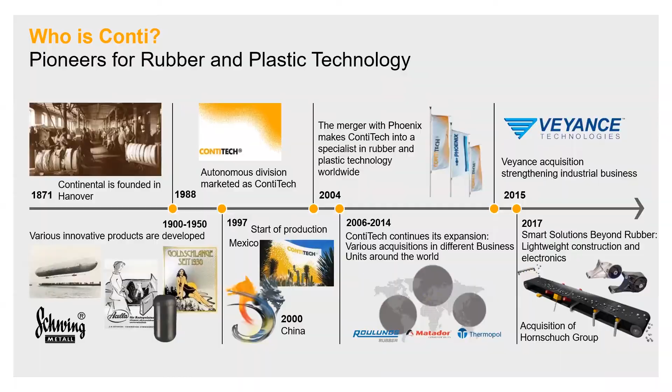And since then, they've been heavily involved in rubber technology, almost 150 years of experience, from tires and belts to the hose products that we're going to talk about today. What we bring is the technical competence from the raw material design all the way up through hose manufacturing and assembly, and then the global presence and customer care. So we have experience and expertise at every one of these steps that helps to guide us.

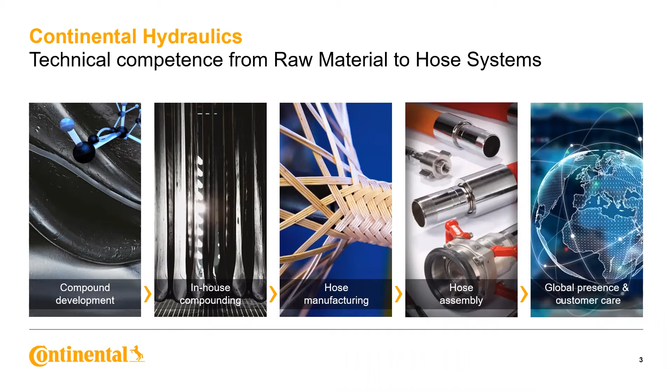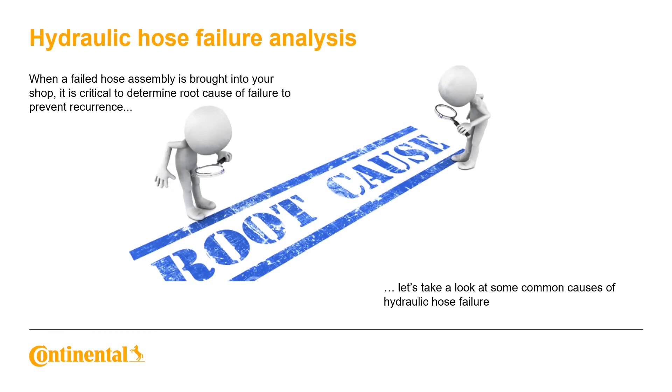And what we're going to be talking about today is, first, we're going to look at some common methods of hose failure and how to identify those if you should see one of them come into your shop looking for a replacement. And then we're going to go into the methodology that we call STAMPED. That's going to help guide you through the process of selecting a replacement hose to make sure that we're coming up with something that's going to perform in the application, and that we're getting the right product into the customer's hands. So without further ado, let's take a look at some of these common causes of hose failure.

The number one most common cause of a failure for hydraulic hose is abrasion of the outer cover. And you can see in the photo what that's going to look like. What this does is it exposes the reinforcement layer, which is typically a wire braid or wire spiral, and allows the ambient atmosphere to corrode that, leading to loss of tensile strength in the wire. And this will end with a hose failure via a burst or a rupture if it's not removed from service very soon.

So there's a couple different things you can look at to replace this type of hose with, but one of the solutions that Continental promotes is hoses with our X-Life cover. These are going to have 14 times the abrasion resistance of a standard hose, so you're able to last that much longer in the application.

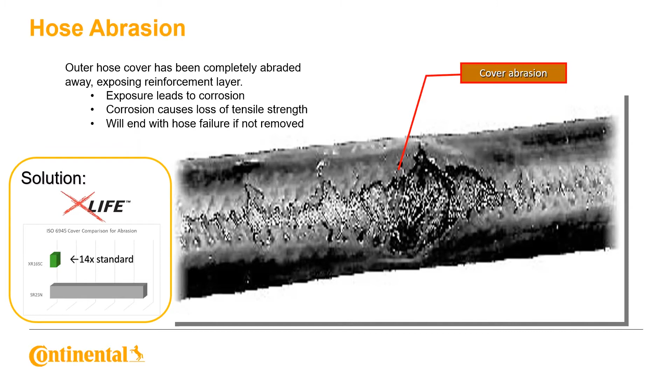Next failure we're going to see is a failure behind the fitting. This can be caused by a couple different methods, either by exceeding the rated bend radius when the hose is installed on the equipment by bending it in too tight or too sharp of a bend. That creates a lot of stress on the hose fitting interface right there that you can kind of see, or by repeated flexing in the application at the end.

So when you see something like this, there's a couple different solutions that may depend on the application, but these can include rerouting the hose so that it is not exceeding a tight bend radius or being flexed. Or in some cases, you can install a bend guard or a bend restrictor that's going to be either a plastic or in some cases metal, either an extruded sleeve or a spring guard that can take some of the tension off of that hose where it's being flexed around the fitting.

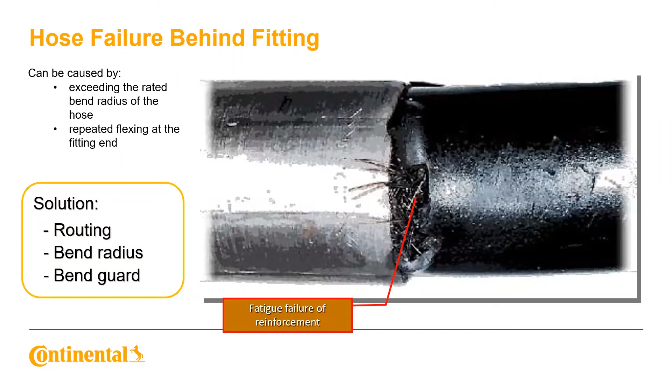Another common one that you can see is fluid incompatibility. So you see here how the fluid that was conveyed in this hose, this is a cross section, the hose has been cut in half, has absorbed into the tube and caused swelling and deformation of the tube material. This is what happens when the material that's conveyed is incompatible with the base polymer of the hose.

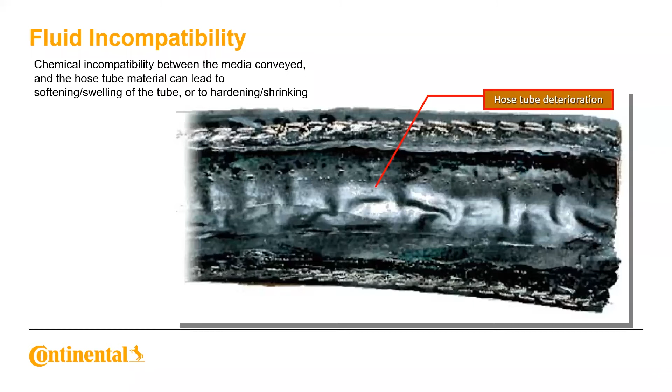So what you're going to want to do here is check the fluid compatibility for what's been used in the application. And an example of where information like that can be found, in the Continental Hydraulics catalog, there's a table of common fluids starting on page 476 that you're able to use to guide, and it'll give you a rating scale for each of the hose base polymers to tell you if it has excellent or good resistance and you can use it, or if it's not recommended.

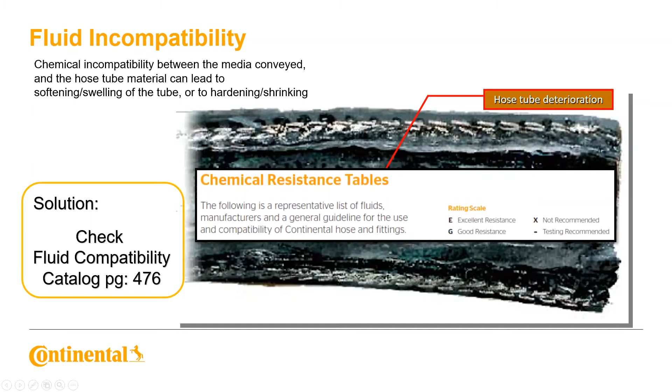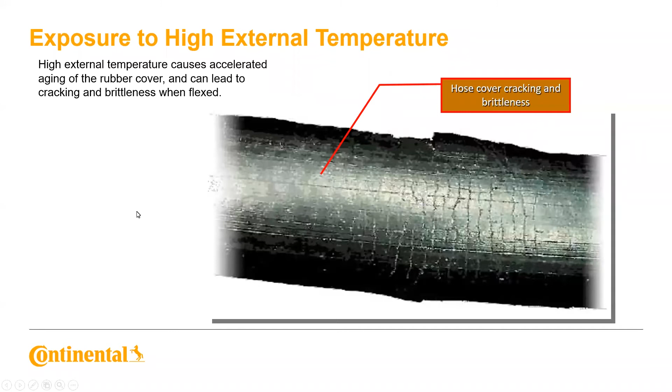Another common cause can be exposure to external or internal high temperature. So exposure to this high temperature can accelerate the aging of the rubber, and it leads to brittleness, which then will crack if it is at all flexed in the application. And you can see examples of what that cracking might look like in the photo. So you have a couple options here.

One solution is that we do offer a line of high temp hoses that are rated to 300 degrees Fahrenheit. This is our desert family of hose. Those are going to be able to resist the high temperature, both of the internal oil from the hydraulic circuit, as well as the ambient temperature.

You also may have some options, depending on the application, to reroute a hose assembly if the area that is being exposed to external temperature is very localized. It may simply be routed next to a high temperature source on a piece of machinery, and it could simply be rerouted to avoid that temperature source if the internal temperature of the circuit is not actually exceeding the rated temperature of the hose.

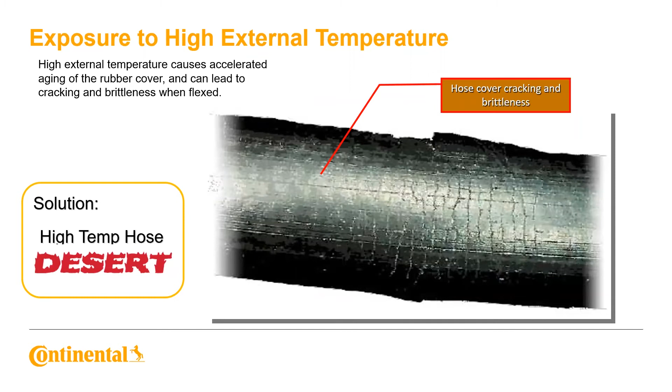Next, we're going to look at a couple things to deal with the assembly process and the fitting. One of the more common failure modes we see is an improperly crimped assembly. So this can mean the finished crimp diameter is not according to specification. Either too tight or too loose can both cause failures in the field. If the crimp is too tight, meaning it is crushing the hose more than intended, it can lead to things like broken wires or cuts in the tube, which could lead to hose failure.

And conversely, if the crimp diameter is too loose, it can also lead to hose failure by not getting the designed retention force for the assembly, and it can lead to a fitting blowout like you see here. So you're always going to want to consult the manufacturer crimp recommendations while you're preparing an assembly.

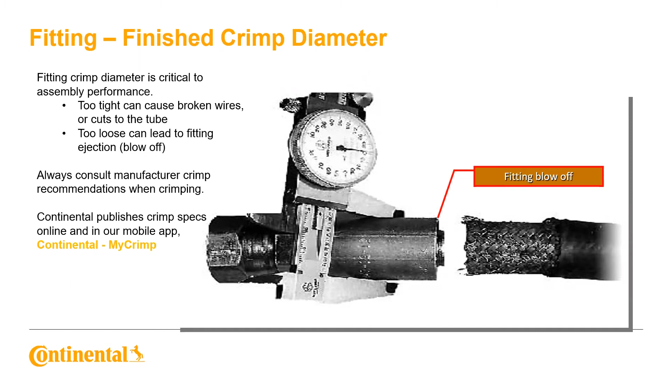Another common issue with the assembly process is fitting short insertion. If the hose is not fully inserted onto the stem prior to beginning the crimping process, some of these serrations that are found inside the ferrule that are designed to hold the hose and fitting together may not be coming into full contact with the hose. As you see in this photo, there's really only one barb that's got full contact to the hose. So the retention force to hold the hose and fitting together is not going to be up to design, and you can see a fitting blowout or failure.

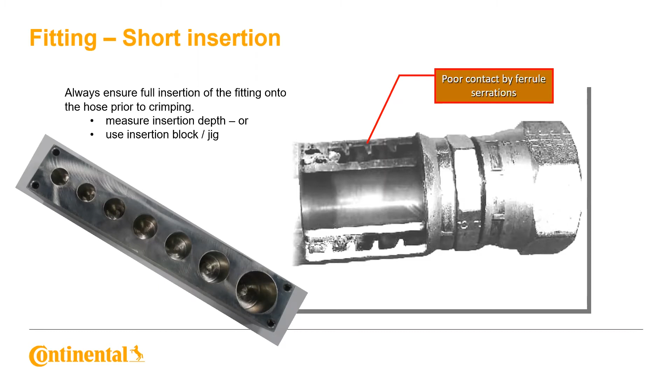The solution to this is to always measure the insertion depth or use an insertion block or jig. Pictured here is the version that Continental sells that matches with our B2 fittings. These holes are machined to the correct depth, so you simply insert the hose and mark it with a marker to get the correct insertion depth every time. So really having a good shop layout and these type of tools is one way that you can set yourself up for success when you're creating these hose assemblies.

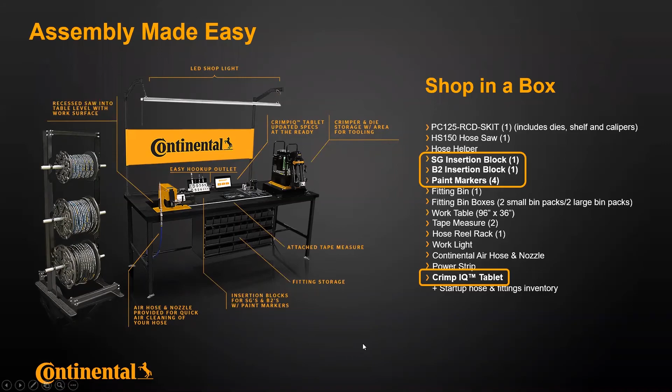All right, now we're going to get into the STAMPED process. So the 7 steps to selecting the proper hose. So if someone has come in with one of these failures, you're going to want to select the right hose to replace it with that's going to perform in that application. STAMPED is a simple methodology that's really going to guide you through that process to make sure that all of the necessary questions get asked and answered to come up with the right hose for that application.

So STAMPED is an acronym, and we're just going to walk through each of the letters, what they stand for, what they mean, in order. So starting with S, very simple. S is for size. So this refers to the inside diameter of the hose. And there are several ways to determine this. Some of them are pretty obvious, some of them a little bit less so. And it's going to depend on what condition the returned assembly is in, which methods you have to use to determine this. A lot of times it's going to be relatively intact and you will be able to read it right off the lay line.

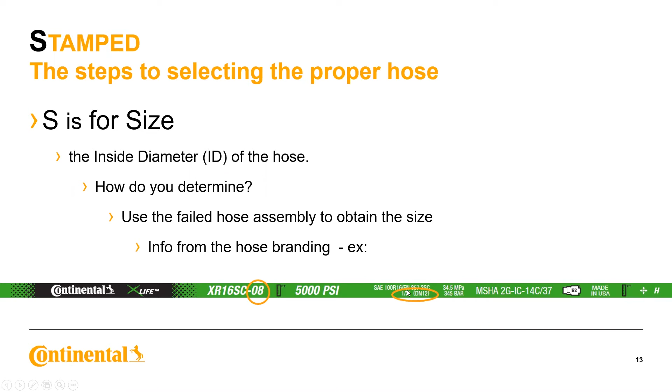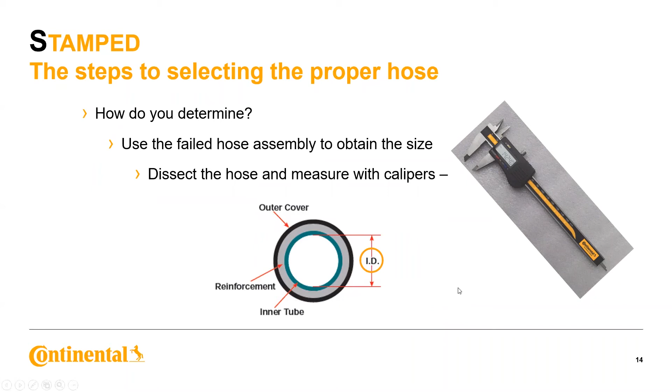You can also use various measurement tools to actually physically measure the ID of the hose if it happens to have a very poor condition outer cover that you aren't really able to read and you're not sure what size it is. You can dissect the hose and measure it with, for example, a caliper. And why is this important? Well, when you're replacing a hose on a system, it needs to have the correct ID to handle the GPM of the hydraulic circuit as it was designed.

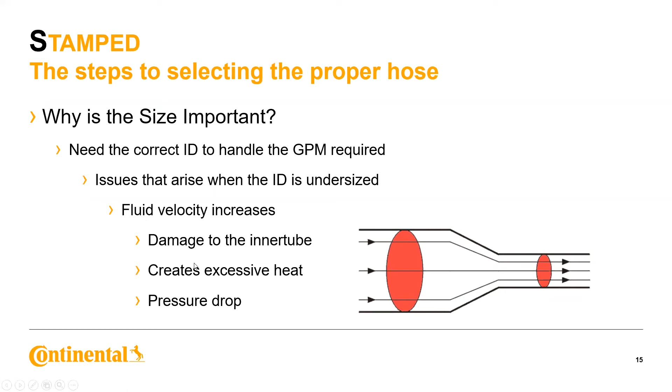And there are issues that can arise if it is too small, and there are different issues if it is too large. So if the hose you replace it with is undersized, that's going to increase the velocity of fluid, and it can cause things like damage to the inner tube and excessive heat buildup in the circuit, as well as excessive pressure drop. On the other side, if the ID is oversized and too large, the velocity is going to decrease, and you're going to see sluggish reaction time in the controls and increased cost of the hose itself.

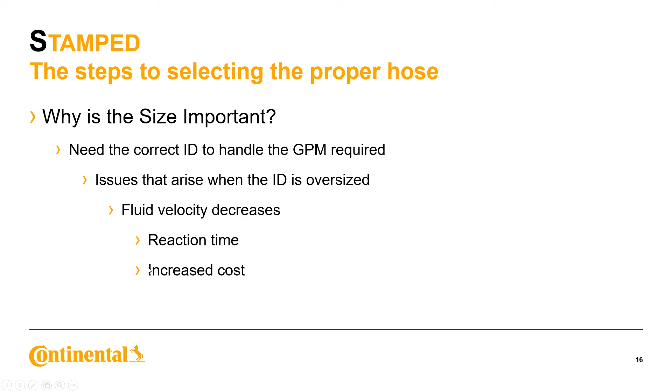The next item is T. So T for temperature. This is going to refer to both the internal temperature of the circuit as well as the ambient temperature of the environment. So the hose must be able to handle both of these sets of temperature ranges, and you want to be on the lookout for anything out of the normal range that might require a special product.

This can include low temperature solutions, for example, the Continental Arctic line that goes to -70 Fahrenheit. High temperature ranges, so the example from our portfolio here is the Continental Desert range that's rated for 302 Fahrenheit. And even higher than that, up to 450, you can use a Teflon lined stainless steel braid hose like an SR14A.

If it's exposure to ambient temperature only, there are some solutions as far as high temperature sleeving that can protect the hose. For example, if it needs to be routed next to a manifold or other heat source, to protect it from that heat, and it can't be avoided by routing.

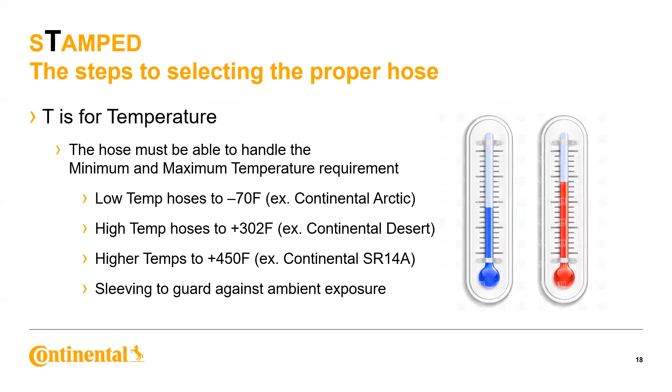So as I said, things that influence the temperature, there's the internal heat generated in the system. When oil is flowing through confined spaces at high pressure, it tends to build up temperature. There are cooling units typically on hydraulic circuits, but they may be underperforming or they may not be able to keep it below the rating temperature of some hoses.

There are external ambient temperatures. For example, in the winter in the northern US and Canada, it can get well in excess of -40 Fahrenheit, which is the typical range for standard products. So you may need to go to a low temperature solution, especially if it's being used outdoors or even indoors. You see, for example, forklifts that go into drive-in coolers at industrial food processing and that type of plant.

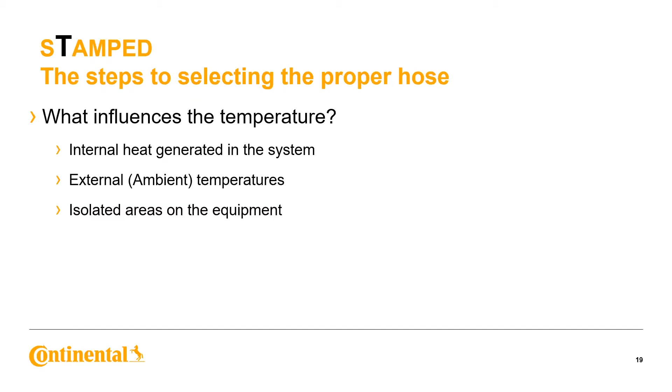Next is the A, which stands for application. So this refers to the environment that the hose must operate in and the performance requirements of the hose to handle that. So this is going to be things like the minimum bend radius, abrasion, and approvals from third-party agencies. For example, the US Coast Guard, ABS, which is the American Bureau of Shipping, or API for oil and gas type applications.

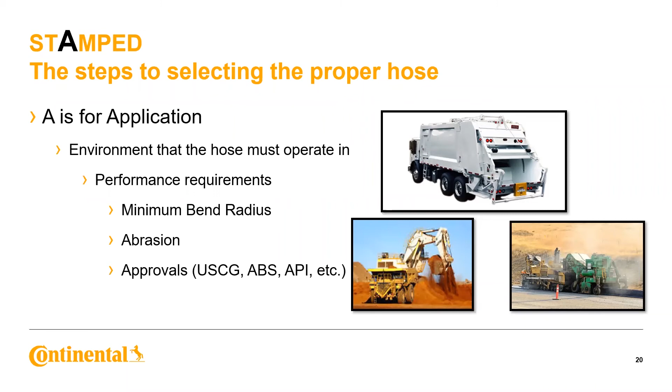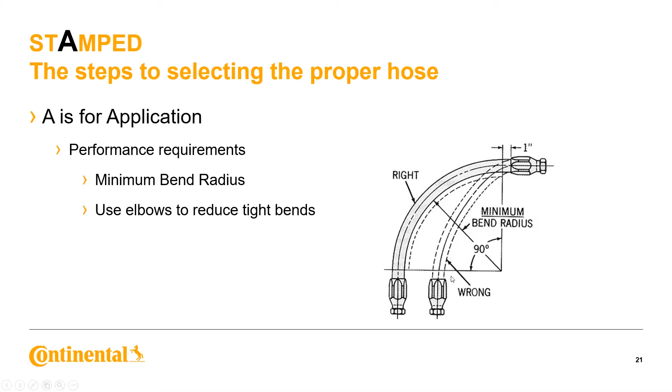There are several solutions for this. You can use longer hose pieces to route differently to avoid these, or sometimes the application will call for a certain type of elbow to reduce these tight bends. For example, if you had a 90-degree elbow, then it would be a straight run.

Performance requirements, as I said earlier, abrasion is the #1 killer of hydraulic hose in application. And you have some options here to fight against that. You can go to abrasion resistant covers like the Continental X-Life, or in extreme cases, the Continental Armor Coat, which has an ultra high molecular weight polyethylene film on the outside for the highest level of abrasion resistance.

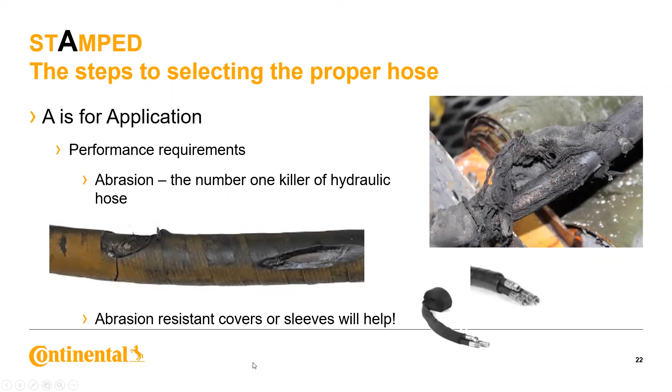And then you can also get some different types of hose sleeving that can go on the outside of a standard hose to protect it from abrasion. There's woven Kevlar sleeving that you see here. And then there's also the spiral extruded plastic or PVC sleeving that can be found here. Continental has both of these in our line to protect hoses that are going into environments like this.

And this can include approvals from third-party agencies. So as I said, certain specific applications will have third-party approvals that are needed to get their hose in that application. The most common one for HDA that you're going to probably deal with is going to be the DOT, I would expect. So we have some DOT approvals on some of our fleet hoses for brake lines.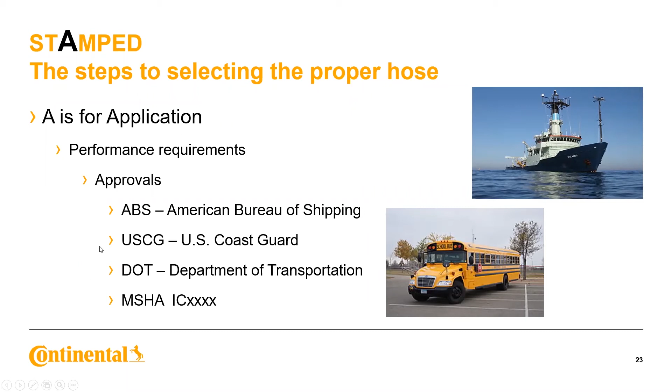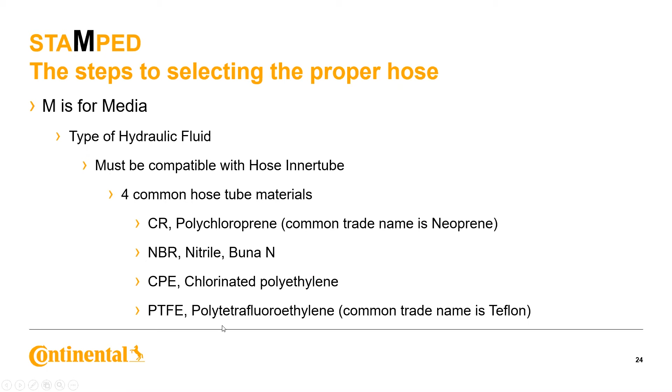All right, M is for media. This is the type of hydraulic fluid, so you need to ensure that it's going to be compatible with the hose inner tube. There are 4 common hose tube materials: neoprene, nitrile, CPE, and then PTFE or Teflon. As I mentioned earlier, you can find compatibility data in the Continental catalog. So this is on page 462.

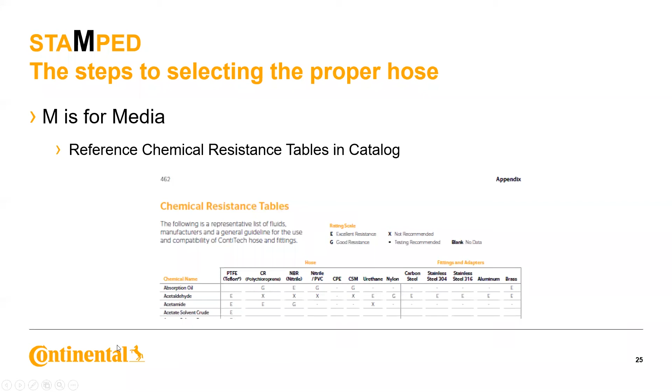And this is what it's going to look like, just a short snippet. The common chemicals are going to be listed in alphabetical order. So you find what you're looking for, for example, acetaldehyde, and then you find the base polymer of the hose in question, which is published on the hose spec page. So most of them are going to be nitrile, and you see that it is X, not rated for that. So you would have to use a Teflon product to handle this.

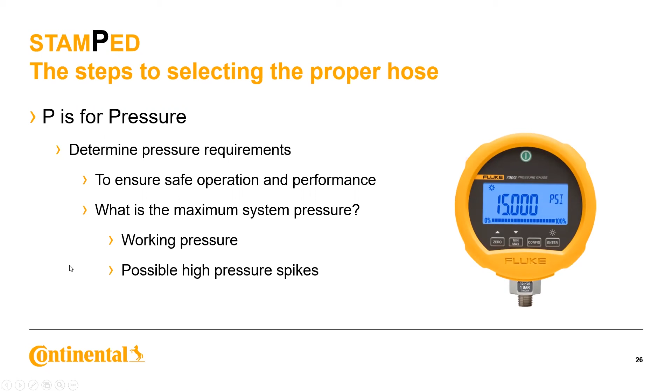P is for pressure, so this is going to be pretty easy, pretty simple. It's defined based on the maximum system working pressure, including accounting for any possible high pressure spikes. So to ensure safe operation and performance, you're going to want to have a relief valve in the hydraulic circuit that's going to handle some of these system spikes, so you can keep it from exceeding the rated hose and fitting. Conversely, you would size that hose to be able to account for that system working pressure.

One thing to note is that the fitting must also be rated to the proper working pressure as well. If the fitting working pressure is lower than that of the hose, which is pretty uncommon, but it can happen, the hose assembly is rated only to the lower of the 2 working pressures.

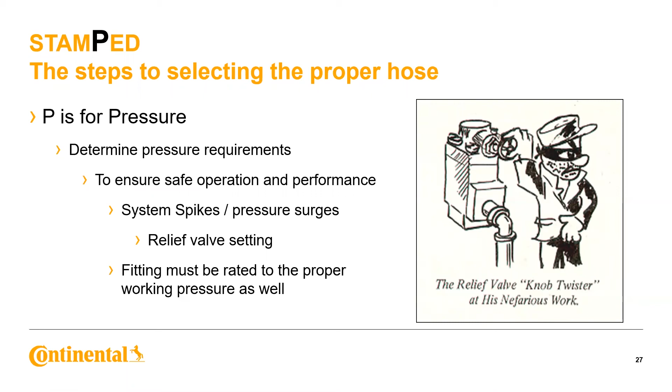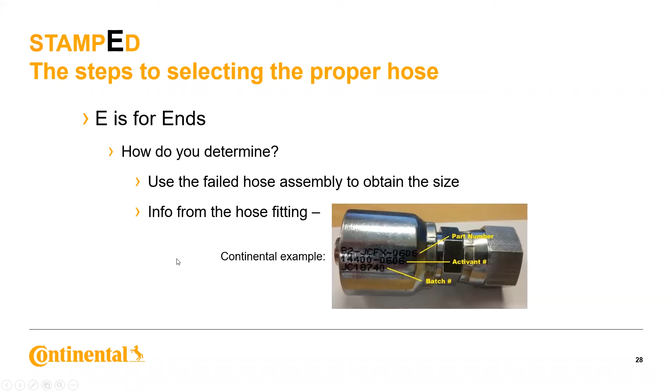E for ends. What kind of connection type came in on the assembly? So if you have a failed assembly, you can use that to obtain the size. There's a couple different ways you can look at doing that. The simplest is someone like Continental. We include a lot of this information printed right on the fitting. You see here, it's got our part number printed right on it. Might not be visible after a long time in service though, so there's some other ways you can look at determining the ends.

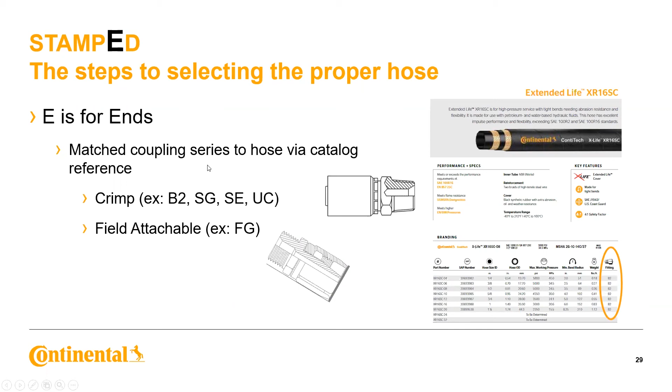The family is determined based on the hose you've selected. So the Continental catalog or the Crimp app will both tell you what family of fitting needs to go to that hose. So for example, a B2 for braided hose or an SG for spiral hose. And then you need to determine the sealing type. So this is the metal to metal part of the connection just at the end of a hose fitting.

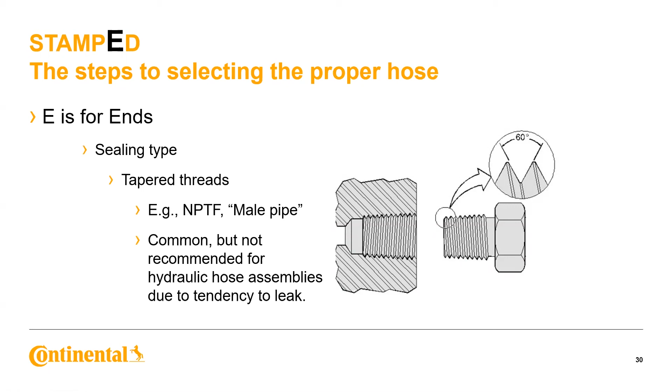There are a couple of common families of connection type. The first one is tapered threads. So this is going to be like an NPTF thread or male pipe. It's common, but not really recommended for hydraulic assemblies. It has tendency to leak and can't really handle vibration or retightening in application. The most common thread type in North America is the JIC 37-degree flare. There's also the SAE 45-degree flare that's common in automotive, in on-highway type applications.

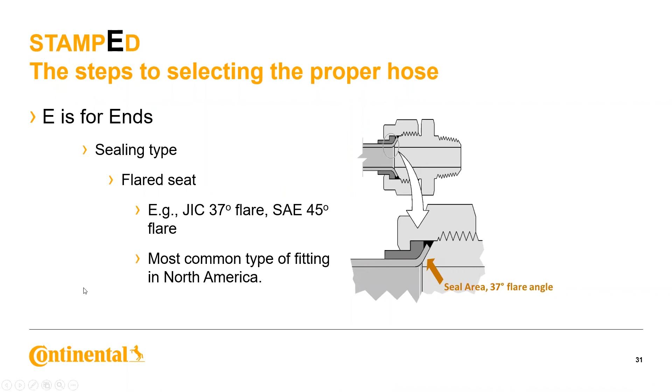And then you can have a metal to rubber sealing method that involves an O-ring. This is going to give you the best performing seal for hydraulic systems, short of a flange connection, which is the next group. But this is better for higher working pressures.

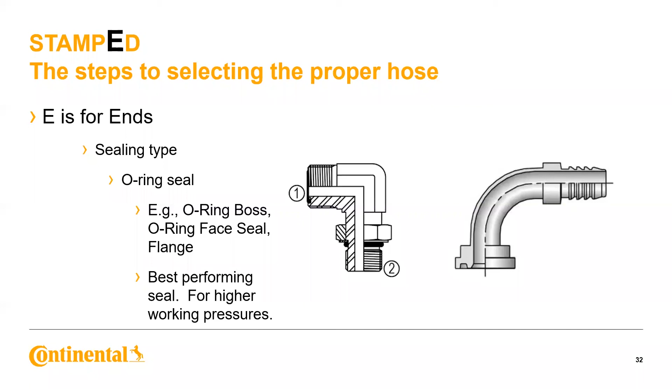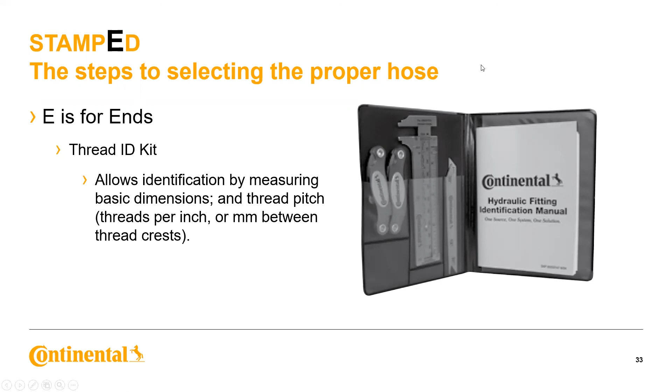And the way you can tell between the different types of threaded connection is to utilize a tool like this on the screen. So this is a thread ID kit. It has a couple different tools in here that allow you to measure the angles of the sealing surfaces, the spacing and pitch of the threads or between the thread crests, as well as a simple caliper for basic dimensions. And given those 3 sets of tools, you are able to narrow it down to the specific threaded connection that you need.

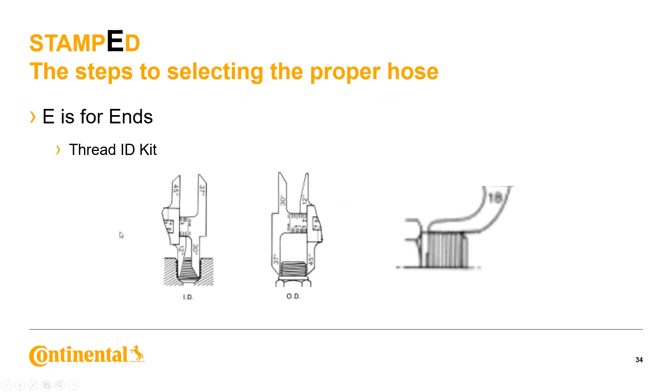Here's an example of how some of these work. These are using the thread gauges to measure. Right here, this is the sealing surface that it's measuring. Right here, it's checking threads per inch or per millimeter, depending on if it's metric or standard.

And then finally, the last letter is the D for delivery. So how does the customer want this? Is it going to be a bulk hose in a standard box or reel quantity? Is it going to be a custom packaging? Is it an assembly? So this is going to be pretty much determined based on what your customer is asking for. So those are the 7 steps.

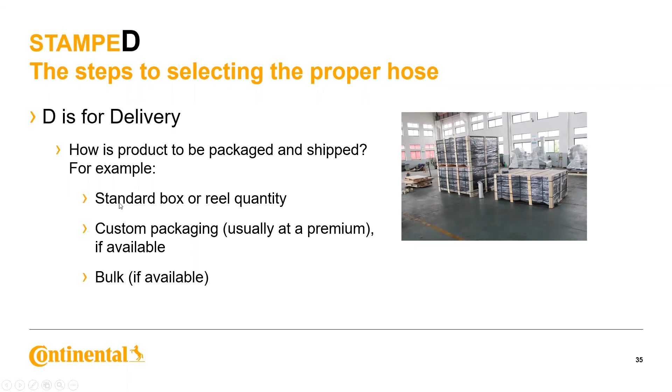Continental also offers a nice new tool that really guides you through this process. This is the digital version of STAMPED that's at our website, hoseselect.com. So anyone can get there. It's free to use. It's wide open. Anyone can look at it. You go through some simple questions here that are modeled off of the STAMPED process, although it's not word for word STAMPED, but you answer a few simple questions and it's going to kind of guide you to what some acceptable products might be.

So it's also great to get simple spec sheets. If you know the hose that you have, for example, XR16SC, you can search for it in the search window and it'll take you to basically the catalog page that can also be printed out to form a spec sheet. So this is a really nice tool. So you don't necessarily have to remember every step in that STAMPED acronym, just have it in your mind and know that there are tools out there that can help guide you to selecting the right hose for the right application.